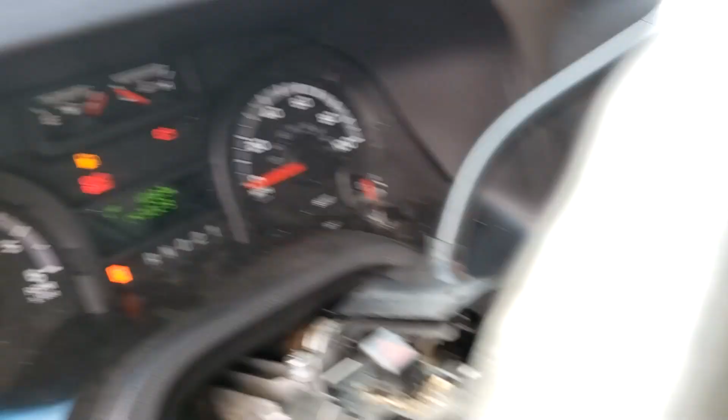2013 E250 Ford van. It's a crank no start. Dash lights are on, I think the headlights are on. No, the headlights were on, they went out. Dash lights are on, which is funny because the keys are right there. If I go to crank it, it won't start, but it will keep cranking.

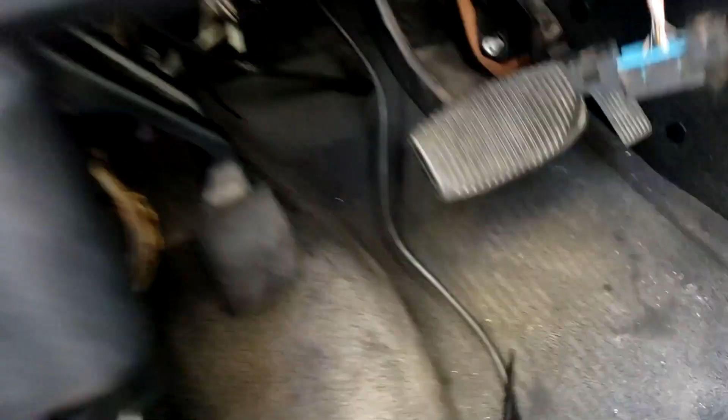I'm going to start with green crusties in the smart junction box. I'm going to guess that thing is getting back fed, because there's my ignition switch, there's my smart junction box, which I just showed you.

Buddy. Say hi, how are you? All right, why don't you make more videos? Because I keep getting interrupted.

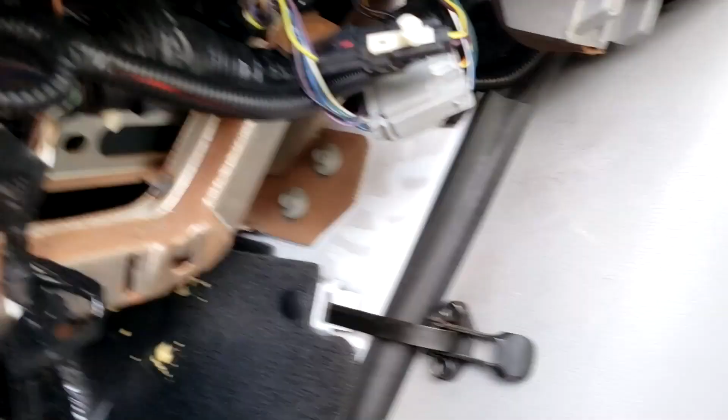Minus the glare, where was I? Ignition switch is acting like it's on, runs through the smart junction box, which is that corroded box I just showed you. Simple enough. I'm going to come up here to the ignition switch and unplug it.

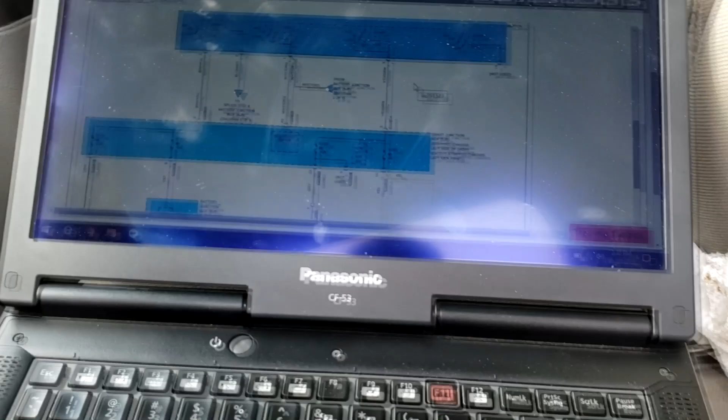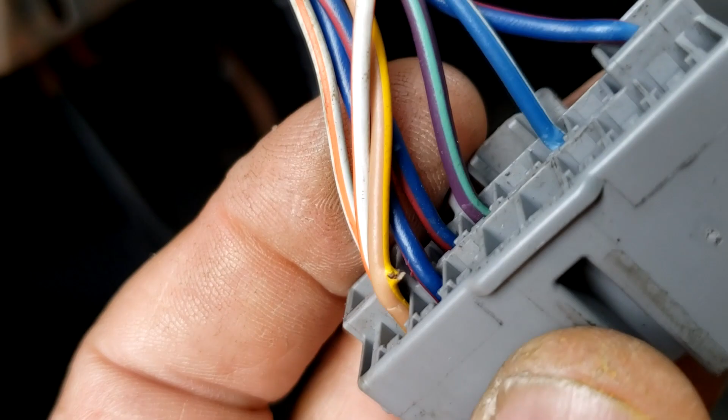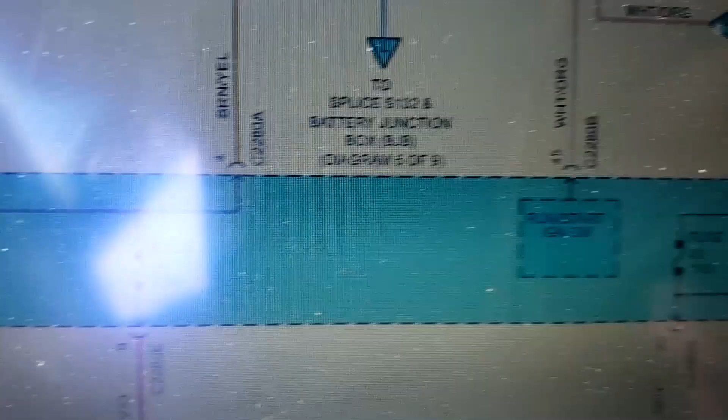More noise going by. Let me find out what fuses out. What I want to do is grab and see if I have power at one of these fuses, let's say like that one, and maybe one or two of those. See if I have power where I'm not supposed to. And we'll go backwards from there.

A little quick, I do not have power at the fuses where I thought I might. Fuses 42, 43, 44, 45, only with the ignition switch on. That's actually working properly, it's way down there. No, you have to trust me, they're in there.

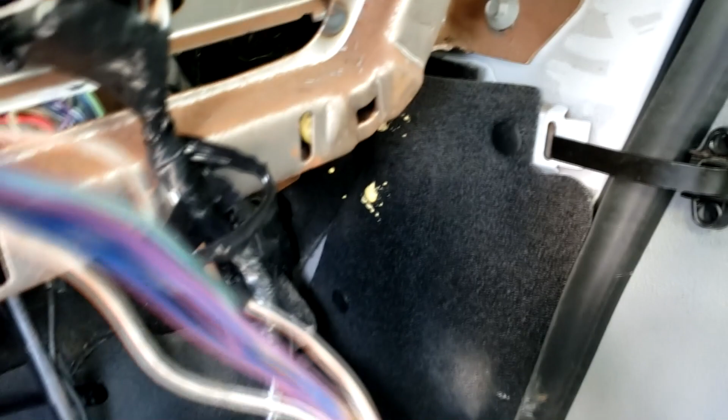They do work with the key on, they go off with the... they work with the key on, they go out with the key off. Unplugged the ignition switch, my power is my blue and red, blue and red, blue and red.

This, if I can get it... that's my orange and white, white and orange, orange and white, orange and white. Orange and white is right here, and that comes from my ignition. It's supposed to be coming from my ignition switch to ground the run start relay.

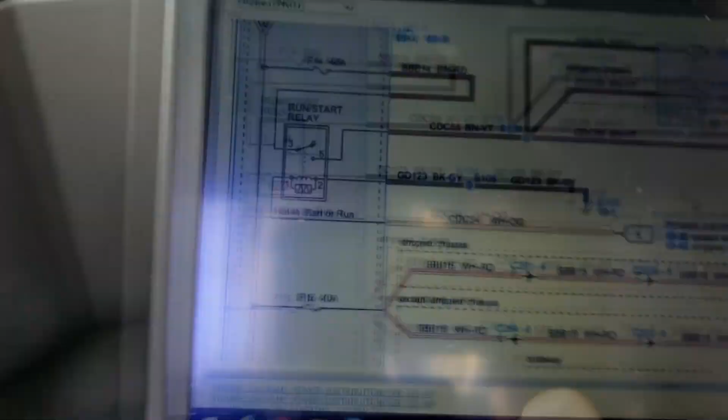So what I'm getting is, I'm getting power on this, which tells me which is activating that, which means somehow this wire, even with it disconnected, has power on it. So it's either coming right from somewhere, corrosion inside the box here, that's carrying power over. It's always fun doing this with the noise, isn't it?

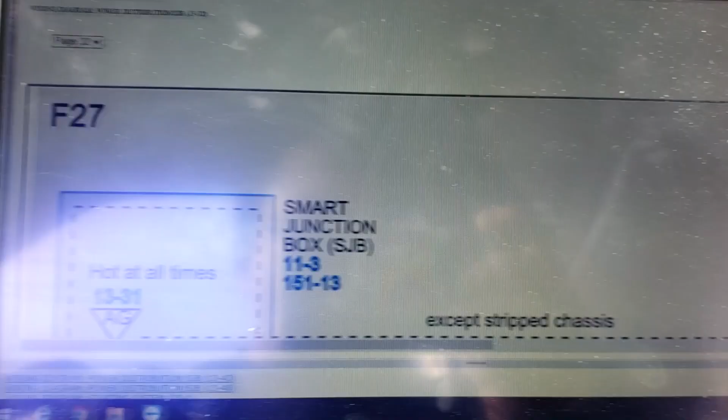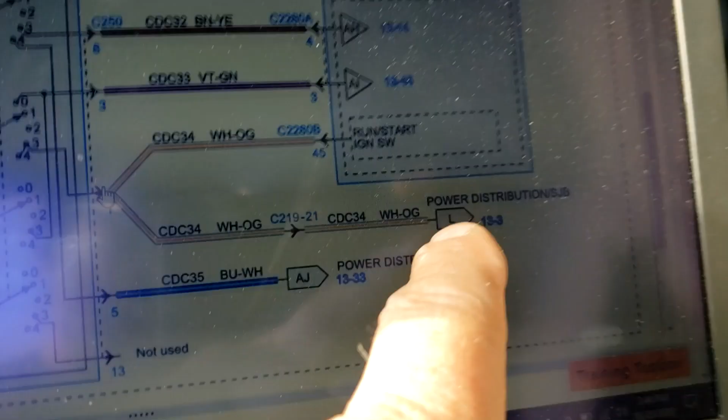Let me show you where it is. Here it is, here's where it starts, right off the ignition switch. Here's my white and orange wire. It goes to the smart junction box here, and that's what goes to that other diagram I just showed you. A little better, right there. That goes to the run start relay.

So I'm getting back fed through from here, or somewhere in that smart junction box. I think at this point I want to pull it. We can go and see what connector this is. Yeah, great, that doesn't help me. I would actually need to go and see it.

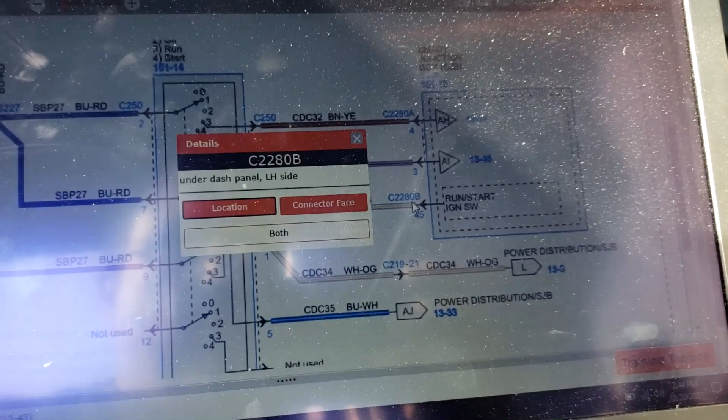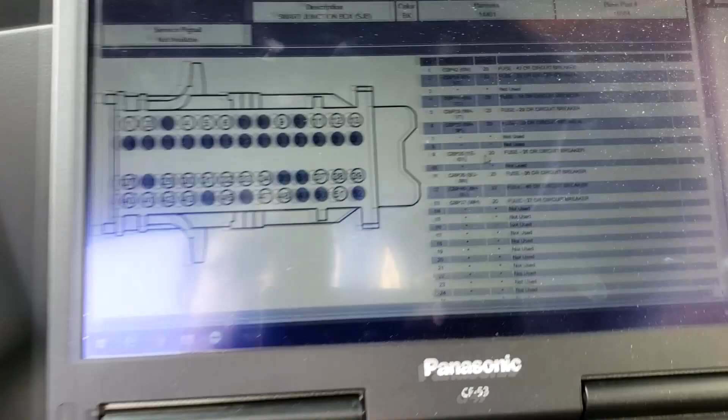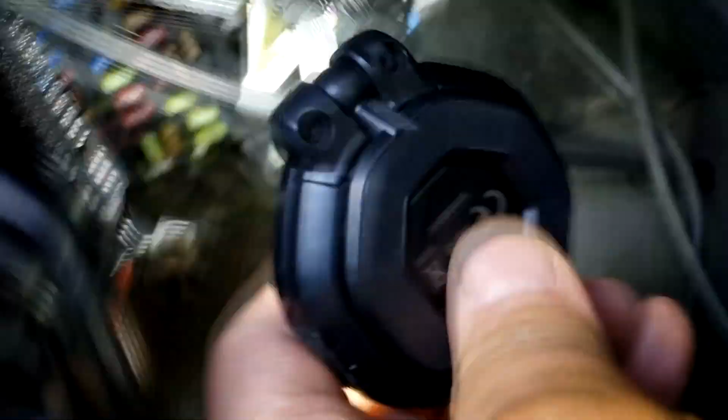Yeah, let's see, connector face. Let's see if that helps. That's that one right there. That's the 52 pin connector. I can probably go at it that way, see if I can find it. I do believe it's going to be wherever my light is. I think it's going to be this one right down here. I think that's the connector we're looking for.

I'll research it and we'll see. Hopefully I can still bring you along, because it's getting late.

All right, pick up where I left off yesterday. If I can follow along without interruptions or the glare. I know. Let me go back a second here.

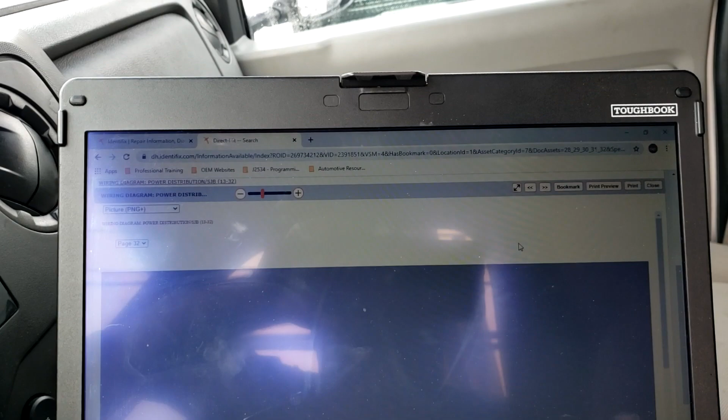I know, when I put the key on, I turn the key off. These are my powers into the ignition switch. This is one of my powers back out. And I put the key on, I turn the key off. This white and orange double feed should shut off, and it doesn't.

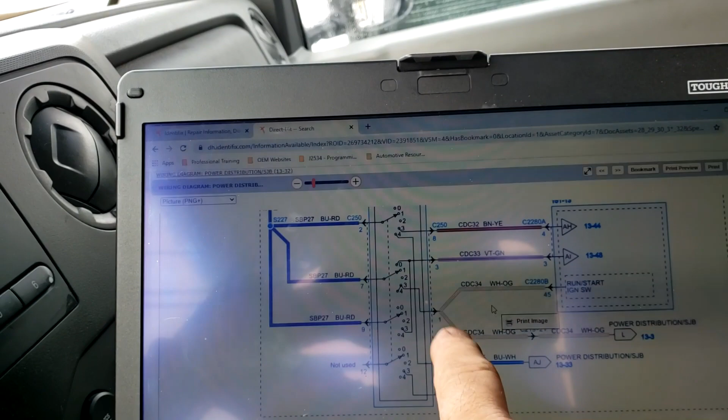Even if I turn it on, turn it off, and disconnect this plug, the whole plug, these wires stay live. If I disconnect this plug from the smart junction box, it still stays live. And that is, if I can show you, there's my light lit up. That's the plug, that plug is out of the smart junction box.

Okay, my video went out. Hopefully I got all of that. So, if I go to...

Stick with me, this is interesting. Here's the relay right over here. There's my white and orange wire. I shut the ignition off, and that keeps power. Even with the ignition off and the ignition switch disconnected, it keeps that coil alive, keeps that relay energized, which of course now feeds the rest of the truck.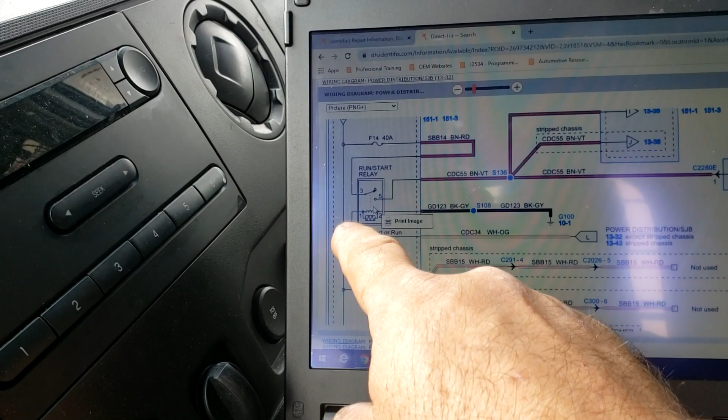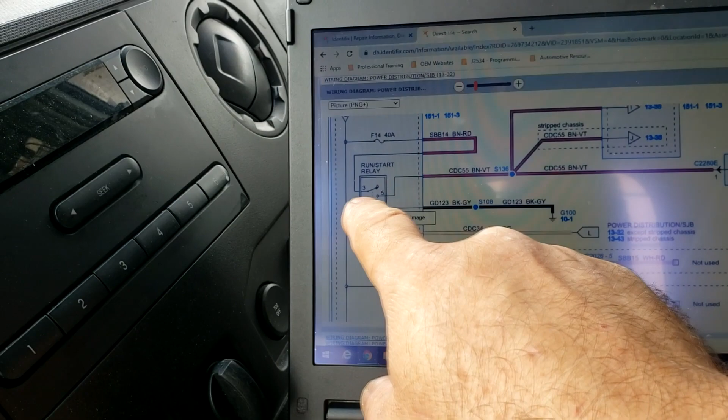If I unplug the coil right there with my extension lead, everything goes back out. If I hook everything back up, ignition on, ignition off, circuit stays live. If I disconnect either side of this contact on a relay, the circuit also goes out.

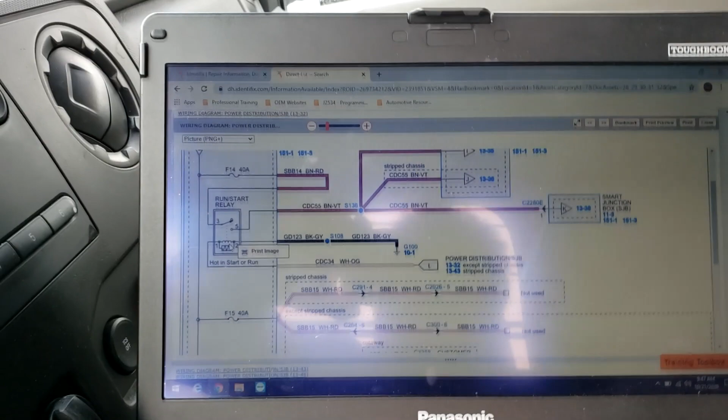I was originally heading for... I gotta go back. I originally thought, hey buddy, doing a video with you.

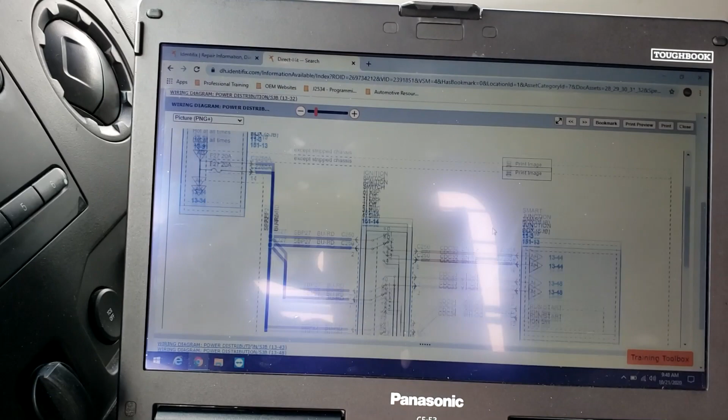I originally thought it was going to be this connector right here, that it was going to be corroded. I thought I was going to find corrosion right here in this connector, somewhere back feeding. But I did not.

If I do connect the connector, same thing. If I disconnect that, which is this baby right here, same thing, circuit goes back out. So somehow when that relay gets energized, once it energizes, it latches.

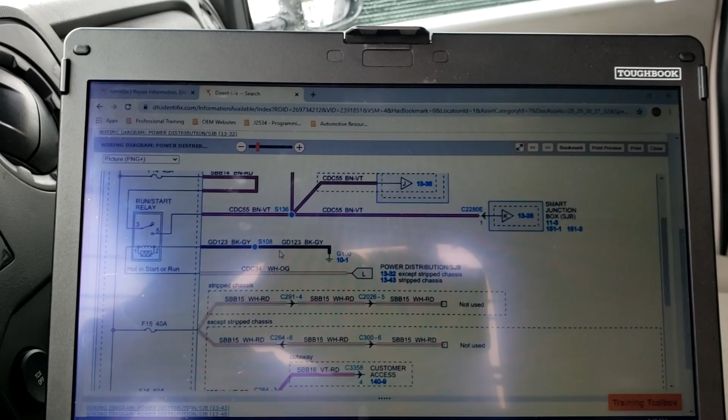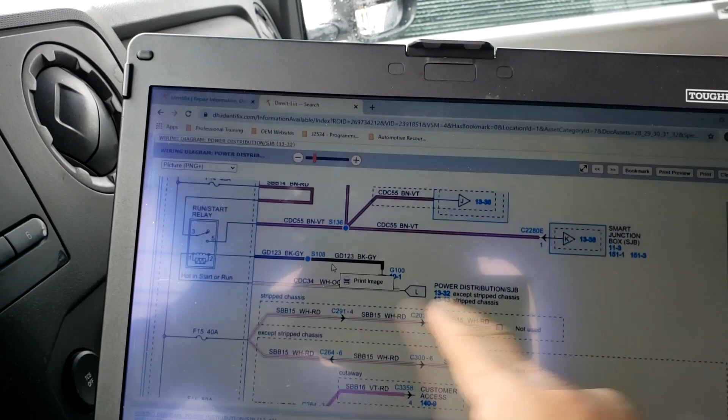My only thought is I'm going to go back to the smart junction box, because if you look right here, when this relay energizes, one of the things it feeds is back to the smart junction box. And if we have corrosion in there, possibly this thing is feeding from here back into here again, creating its own latched circuit until I disconnect it.

I think at this point I may have to pull the smart junction box down, but that's where I'm at. Kind of interesting. Okay, stand by, let's see if I can pick up again.

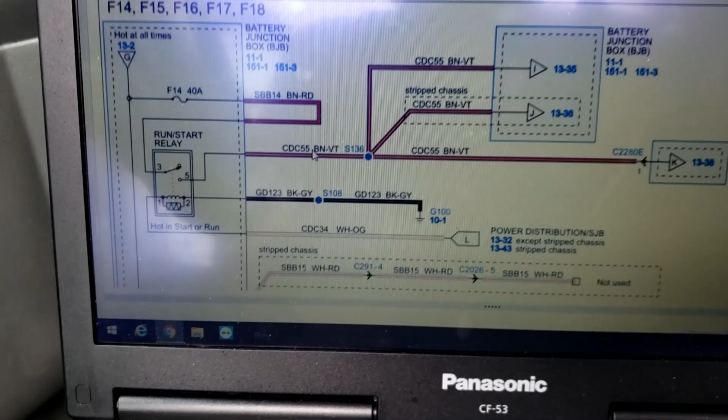So we know that we have constant power on this white and orange wire. It feeds the coil side of the relay. This relay is latching, and then somehow this stays fed. So the thought process is that one of these circuits somewhere is feeding back, once it energizes, to this circuit - corrosion or something - keeping it latched and keeping it on.

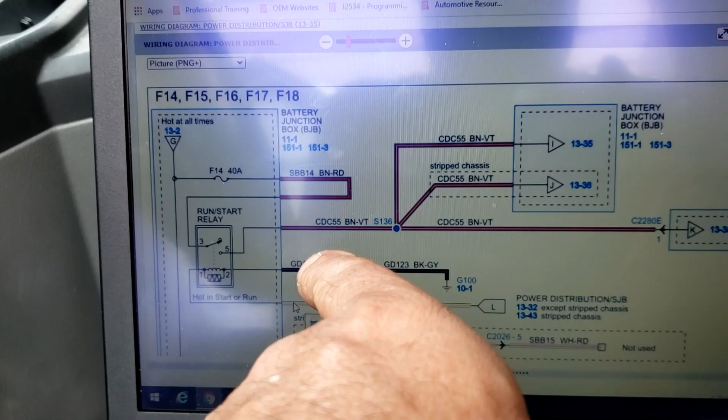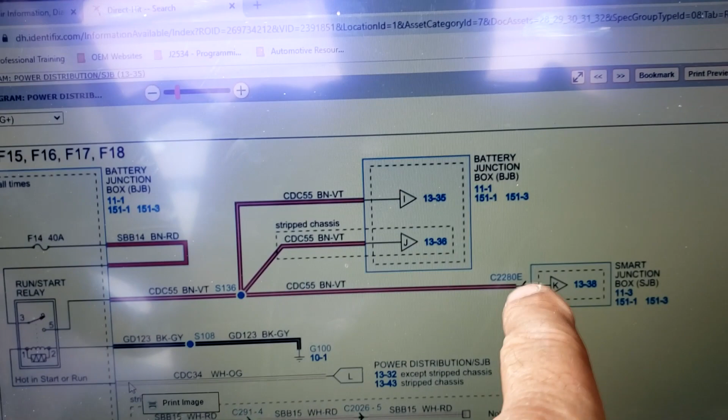I know if I pull one of these terminals, it unlatches this side. I pulled this connector, it didn't make a difference. I went here - strip chassis, regular chassis. This is not a strip chassis, it's a regular van. So we're gonna link over to this.

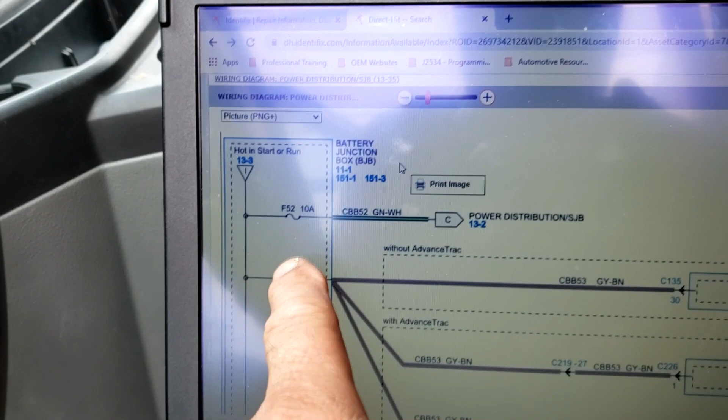Now I found out, here it is - that's continued from the other diagram. It feeds fuse 52, 53, and 54. There it is, 54.

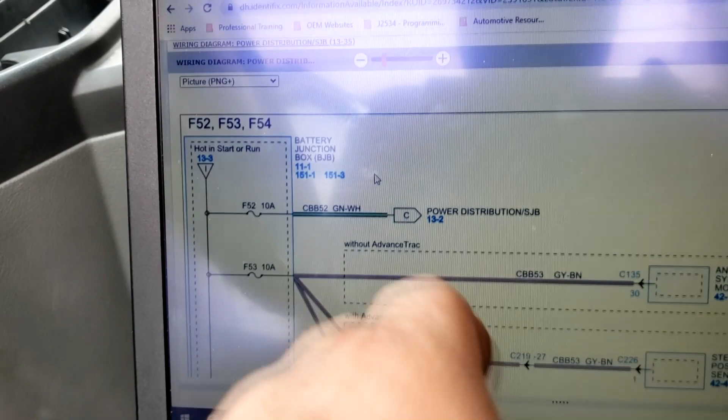So what did I do? I pulled all three fuses, and the relay unlatches. I put them back in one at a time and tried it every time until I got to this fuse right here, fuse 52. With that fuse pulled, the run start relay doesn't stay latched. I can turn the key on and off.

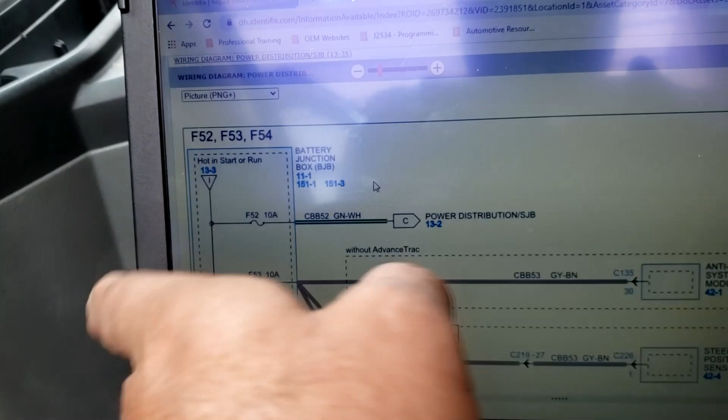We find out what that feeds. We keep going, right? Scroll down. Right here - continue from the other diagram.

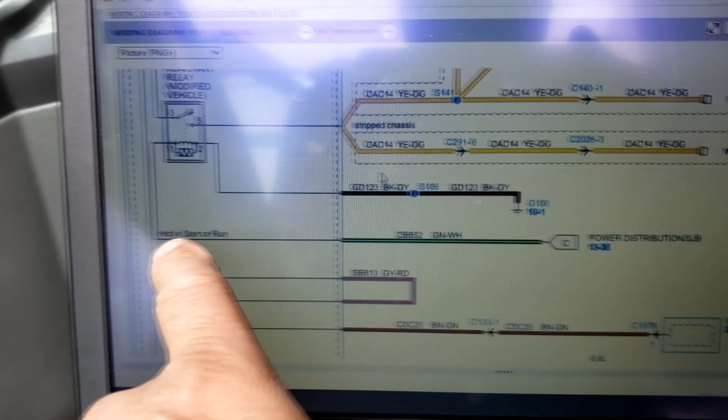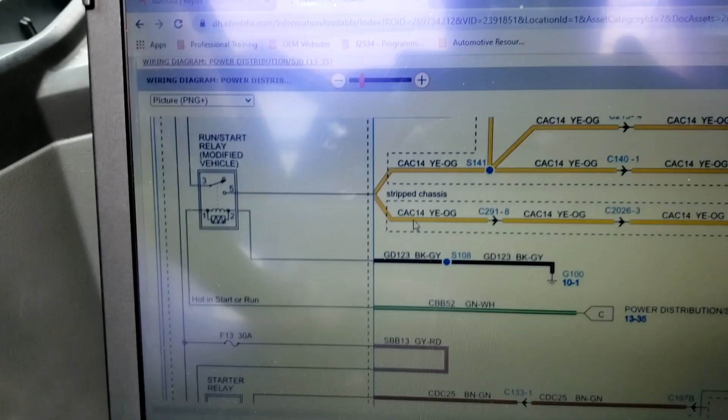Look what it feeds - oh, you can't see what it feeds. It feeds another run start relay for a modified vehicle, which this is not. It energizes that relay, which it does energize. I'll show you that in a second.

That relay - now I will tell you, with this relay pulled, it doesn't make a difference. I still have the same issue.

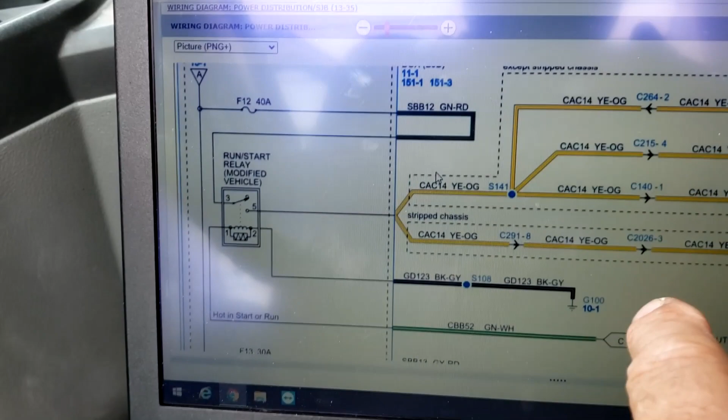However, if I pull fuse 52, this car starts and runs and shuts off. With fuse 52 in place, the van will start and won't shut off, because that other relay, the run start - not this relay, the other run start relay - is getting latched. I believe it's fuse 52 that needs to be out.

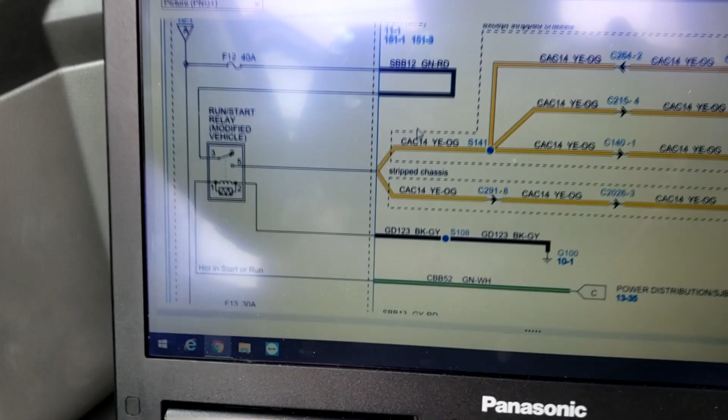Now here's the other thing - this van was also a crank no start. Now it cranks and starts. So I definitely think we still have a gremlin in here.

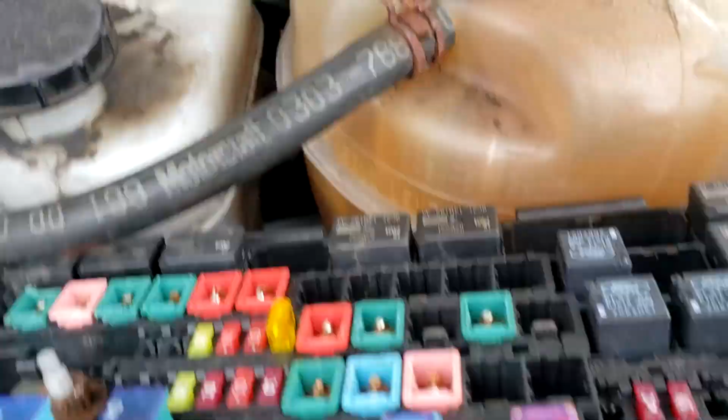I'm betting it's corrosion. I'm betting this thing had water in it and it's dried out a little bit, and now it's starting. Right now the only thing I have is fuse - you can see it, fuse 52, which goes in that spot, is 52, 3, and 4.

I have fuse 52 pulled, it's sitting right here. I have this relay in place - this is your run start relay, and that's your run start relay modified.

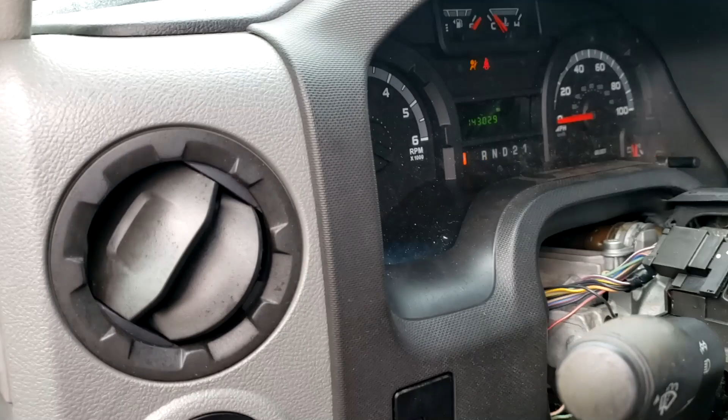Now if I turn the key, this van starts and runs - more noisy cars going by - and shuts off.

If I put that fuse back in - now remember, this is the fuse that feeds - and definitely people have been in here just so we're aware, you guys have probably already noticed it. I'm trying to get my big fingers in here and it doesn't fit. Come on, and it's raining a little bit on my head. You can see all the glass tops for all these fuses have vanished. I didn't do that, it was like that when I got here.

So 52 in place means that this other relay is energized. Come on - car starts and runs. Car stays running.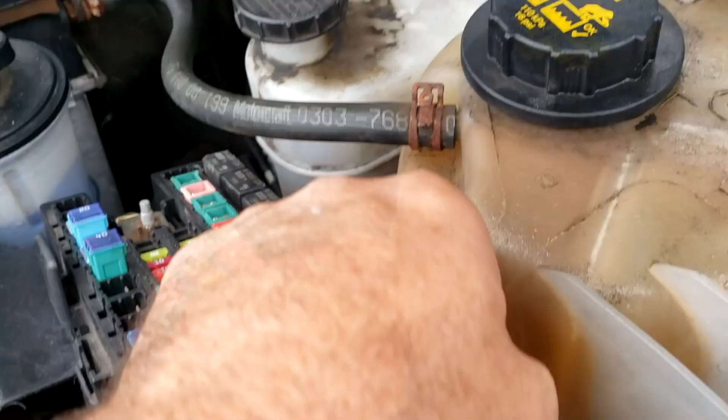Going back out front, 52 feeds this relay. If I pull this relay - oh, it's in there tight - if I pull the relay, it stays running. If I pull this fuse, it will shut off.

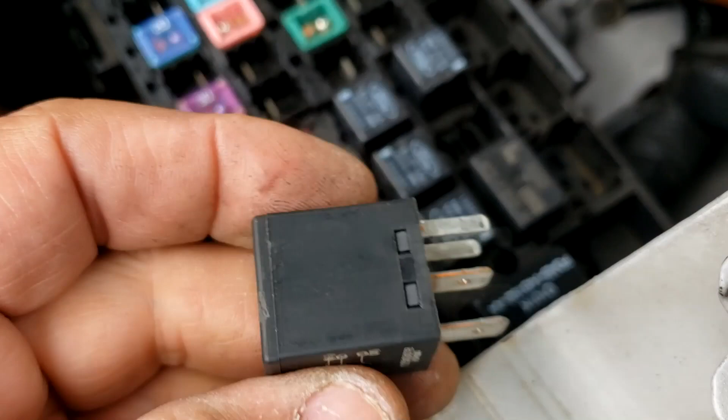This fuse, somewhere in this circuit, is backfeeding this relay. I'm keeping this thing running because if I pull the fuse right now, the truck will shut off. And the only thing this fuse, according to every diagram I'm looking at, feeds is this relay.

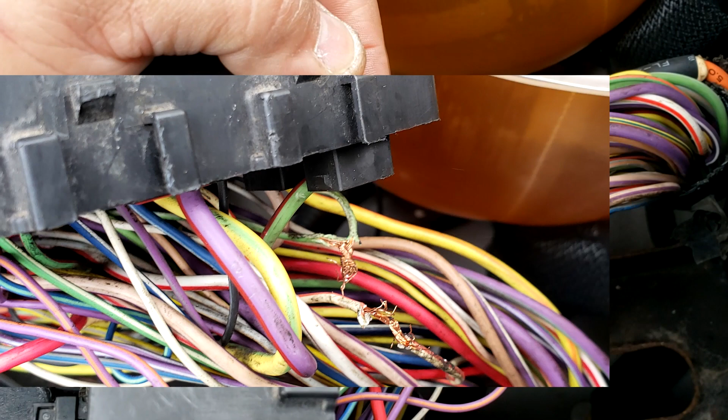Interesting. What I was saying was the number 52 fuse that I pulled to shut the circuit off is this green wire that feeds the coil side of the relay, the second run start relay. When I pulled the relay, it didn't make any change because this is my orange and white wire that feeds back to the ignition switch and back to this smart junction box.

Somebody stripped these, tied them together, taped them and zip tied it. I don't know why, but that caused the first relay to latch.

I think what somebody tried to do was fix an issue with a band-aid, and now I don't know how this only became a problem recently. The guy supposedly pulled into a gas station running, and then it wouldn't start to come out.

I still think the smart junction box is bad. It's corroded. I think there's an issue in there. I think that was the initial issue, and this was somebody's attempt at a band-aid.

So the shop's going to fix these two. Right now the car starts, runs, shuts off like it's supposed to. Everything works. So they're going to fix these two wires - solder them, heat shrink them, whatever, and put this all back together.

We'll see. I have a feeling I'll be back with this van for another issue, and I'm willing to bet it's going to be the smart junction box, but we'll see. That's it for now. Thanks, guys.

So two things. One, that van did end up needing a smart junction box. After we got those wires fixed and got it back together, I don't think it left the shop, and it acted up again. They actually troubleshot it as a bad smart junction box. So that was the end of that crazy nightmare.